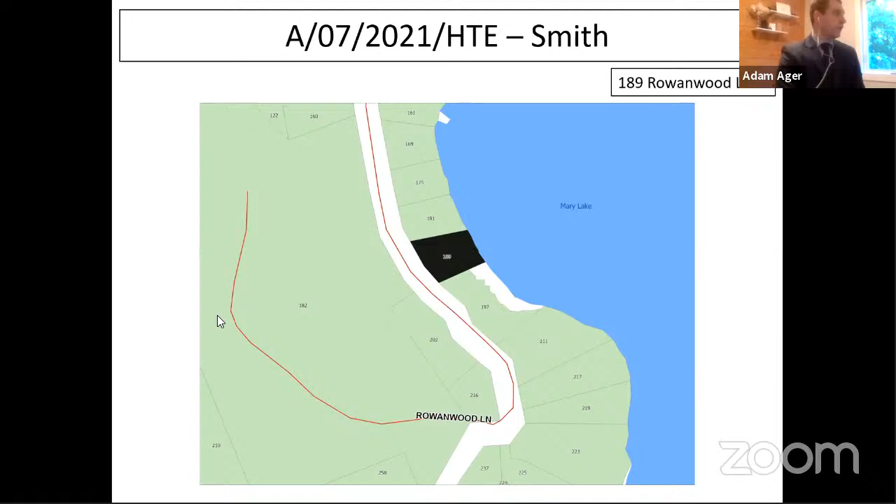Thank you, Mr. Chair. Through you, the subject property is located at 189 Rowanwood Lane. The subject property is designated waterfront in the official plan and is zoned Shoreline Residential 1.

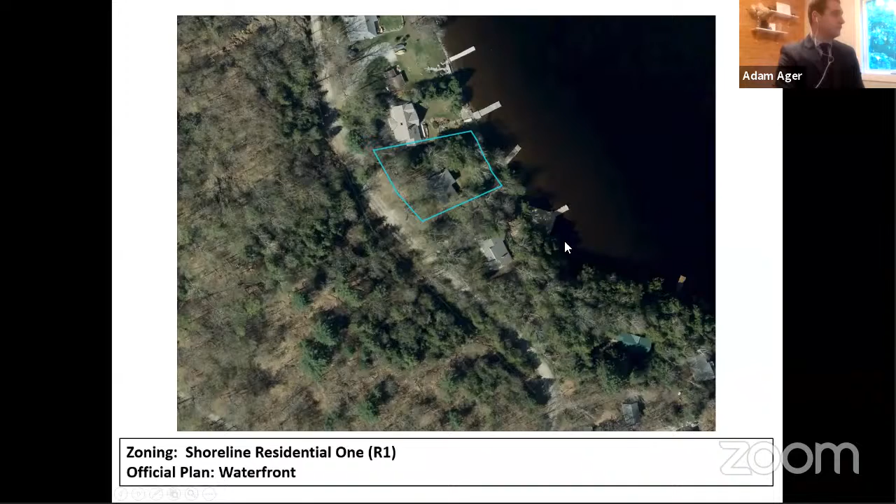The applicant is proposing to construct a balcony onto the existing cottage and replace the previously existing dock. A minor variance is required to increase the primary lot coverage from 10% to 11.5% and increase the accessory lot coverage from 5% to 7.5%. Lastly, the applicant is proposing to increase the maximum permitted projection of the dock from 15 meters to 24.3 meters to allow for a water depth of 0.96 meters at the end of the dock.

The zoning bylaw allows for a maximum dock projection of 15 meters. However, there are provisions that allow docks to project up to 30 meters if it's required to achieve a water depth of 0.75 meters. In this regard, the applicants are seeking relief of an additional 4.65 meters beyond where the 0.75 meter depth would be achieved. And in their opinion, this relief will be to not beach their boat, which they previously experienced in summers past.

Staff are of the opinion that the increased projection does not appear to be justified based on the water depths that have determined to be reasonable, and further that the proposal would not be a minor projection, which would likely have large visual impacts when viewed from the lake and adjacent shoreline areas, and is not in keeping with the policies of the town's official plan, which establishes guidelines intended to limit the visual impacts of development along the waterfront.

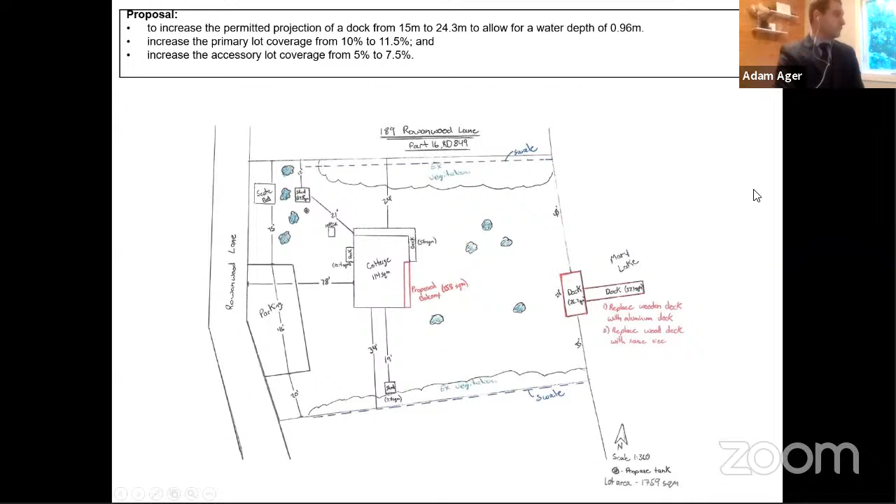The application was circulated in accordance with the provisions of the Planning Act, as well as to the Mary Lake Association. The Mary Lake Association has provided comments that are supportive of the variances for lot coverage. However, they are not supportive of the relief being sought for the dock. A copy of these comments were attached for committee's information, attachment number 4 to the planning report.

That's the next application. It is. My apologies.

In view of the 4 tests of the intent of the zoning bylaw with respect to the dock, planning staff are of the opinion that the 4 tests are not being met. The dock projection is larger than what is typically permitted, and further, it would not appear to meet the intent of the official plan, as the proposal does not adequately address policies related to visual impact and waterfront character. The proposal is not desirable as it is much larger than necessary, resulting in greater visual impact. Finally, this is not a minor deviation from the provisions of the zoning bylaw. As such, staff are recommending that this portion of the application be denied.

Further, with respect to the portion of the application for lot coverage, staff are of the opinion that the 4 tests for the minor variance are being met and are recommending approval, conditional on the owner revegetating the shoreline buffer to the satisfaction of the town through site plan control. I'd be happy to answer any questions you have.

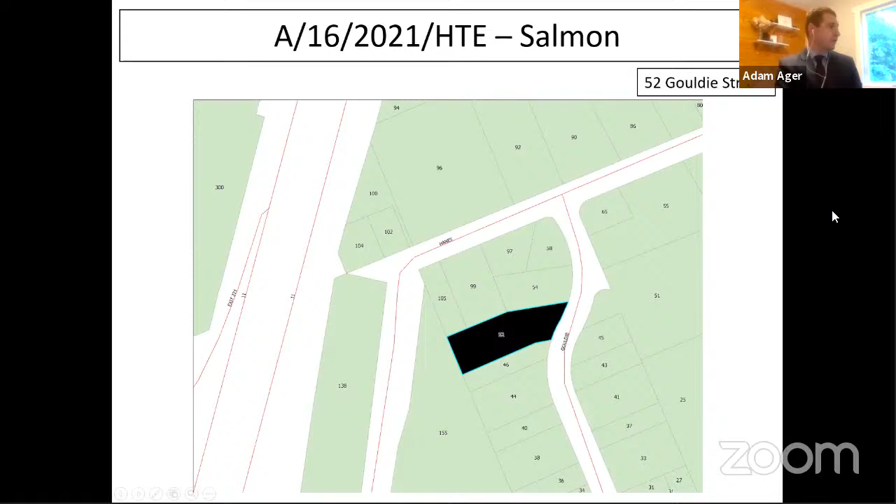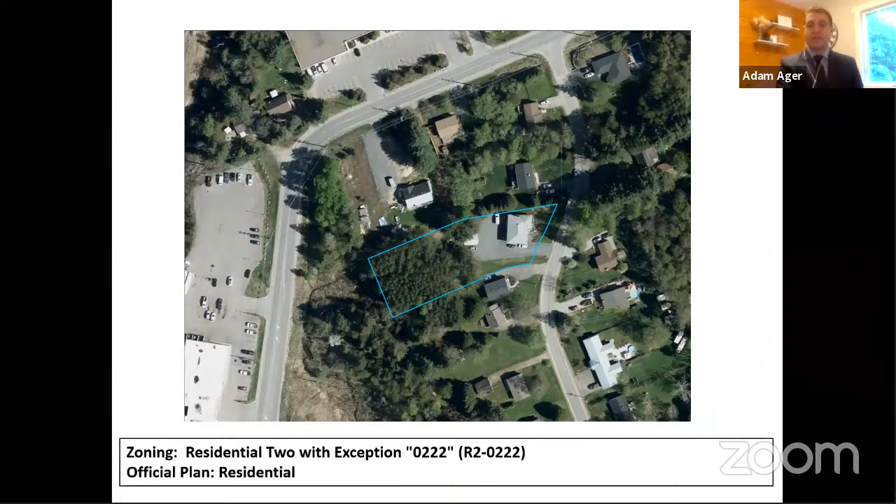The lot is designated urban residential in the town's official plan and is zoned Residential 2 with exception 0222. The site-specific exception on the lot permits a maximum of 3 residential units within the existing building.

The applicant is proposing to construct a new detached garage, and if given favorable consideration, they are proposing to remove the existing shed on the subject lands. A minor variance is required to reduce the minimum setback from a warm water stream from 20 meters to 10 meters for the detached garage only.

The applicant, in support of the application, hired Riverstone Environmental Solutions, Inc., who submitted a watercourse assessment report. The report included mitigation measures as well as recommendations to appropriately address this feature and make sure that the construction and development would not interfere with or harm the feature identified.

Staff are of the opinion that the mitigation measures proposed are reasonable and are also in keeping with the purpose of the provisions of the zoning bylaw. As such, it is recommended that the mitigation measures contained in the report be a condition of approval, should the variance be approved. Staff are of the opinion the proposal is also consistent with the intent of the official plan policies respecting urban residential areas.

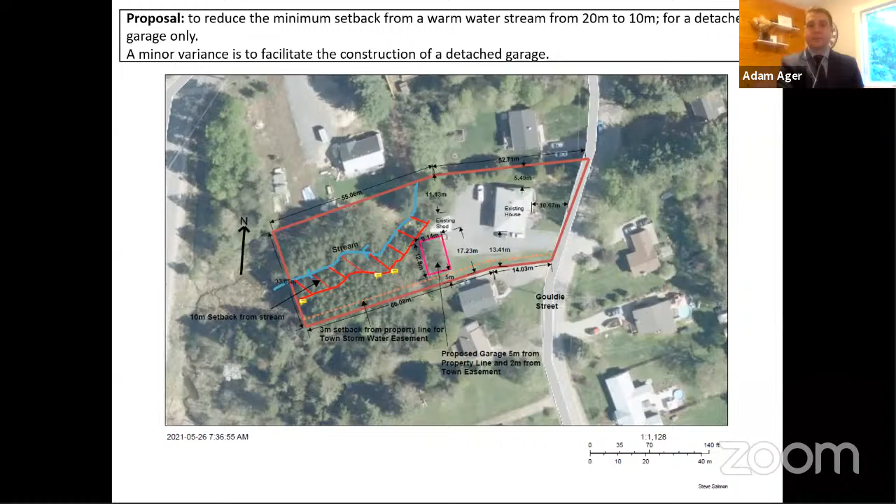The application was circulated in accordance with the provisions of the Planning Act. No concerns or objections have been raised.

The application would appear to conform to the 4 tests for a minor variance as set out in the Planning Act, and staff are recommending approval conditional on 3 items: that the recommendations contained within the watercourse assessment be implemented at the building permit phase, that the existing shed be demolished and removed, and that an easement exchange recommended in staff report Corp 2021-41 be completed. I'd be happy to answer any questions that you may have.

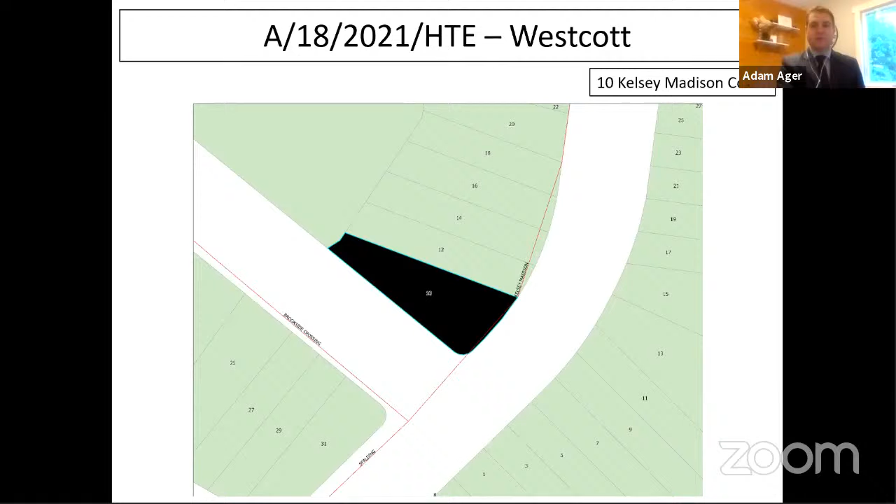All right, Adam, you have one more for us, the Westcott application. I do, thank you, Mr. Chair. Once again, I hope everyone's able to see my screen. Yep, excellent. Thank you. The subject property is located at 10 Kelsey Madison Court.

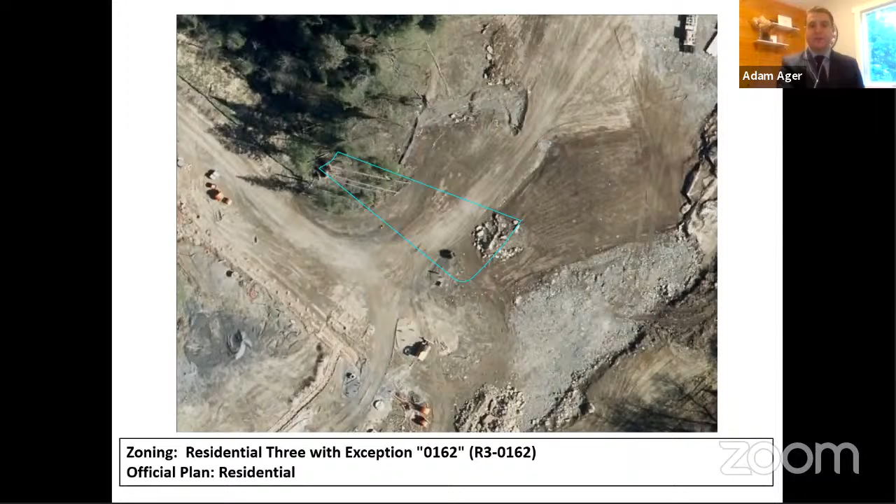The lot is designated in the urban residential area, and it is zoned Residential 3 with exception 0162. This specific exception allows for reduced front yard setbacks, reduced rear yard setbacks, and interior side yard setbacks. It also permits an increased encroachment for decks into the rear yard and an increased coverage compared to the standard R3 zone. The subject property is developed with a townhome, and the application has been submitted to recognize the location

of an existing deck on the subject lands. A minor variance is required to reduce the minimum exterior side yard setback from 3 meters to 0.9 meters for the deck only. As noted in the staff report, the purpose of the exterior side yard setback provisions is to provide adequate space for maintenance, drainage, and also sight lines at the corner.

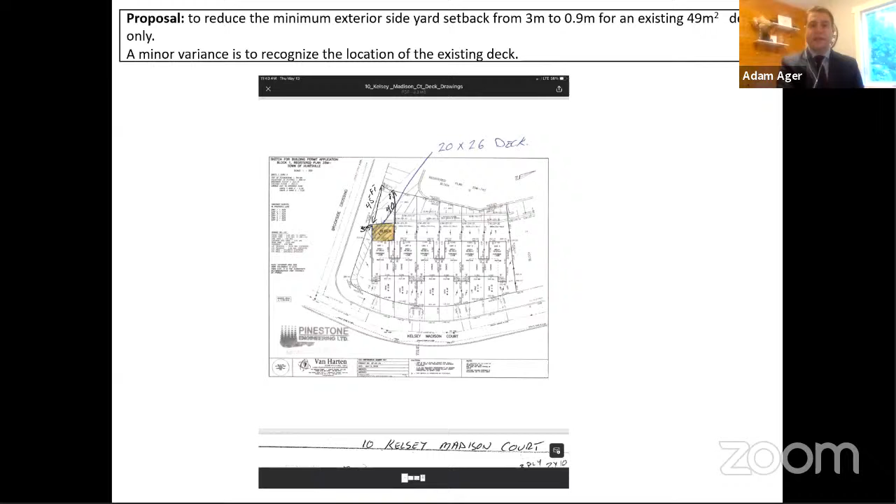The application was circulated in accordance with provisions of the Planning Act, and one letter of support was received from the adjacent property owner, who is in support of the application. A copy of those comments were attached to the staff report for committee's consideration.

Staff are of the opinion that the proposal does meet the 4 tests for a minor variance as set out in the Planning Act, and as such, staff are recommending approval of the application. I would be happy to answer any questions you may have.

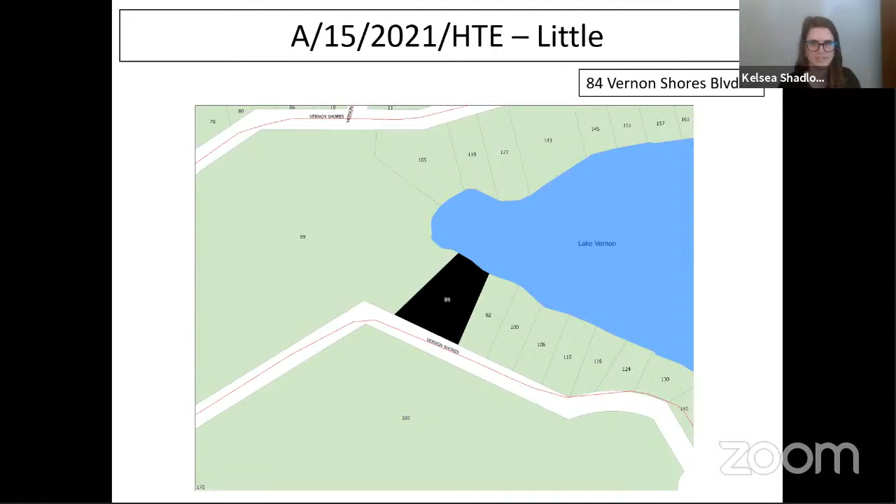Chair. Through you, the subject property is located at 84 Vernon Shores Boulevard. The lot is designated waterfront and is zoned Shoreline Residential 1 and Natural Resource.

The application has been submitted to recognize a 134.89 square meter single detached dwelling with an attached garage and deck that is being constructed within the 30-meter setback required to be maintained from type 1 fish habitat. A minor variance is required to reduce the setback from 30 meters to 22.7 meters.

The lot was previously developed with a dwelling, dock, garage, and 2 sheds. Redevelopment of the site was proposed and the property received site plan approval, and a site plan agreement was prepared showing the new dwelling and all accessory structures in complying locations. However, following the commencement of construction, it was confirmed that the new dwelling encroaches within the 30-meter setback.

To address the type 1 fish habitat, a fish habitat assessment was completed by Riverstone Environmental Solutions, Inc. The report provided background on the Lake Vernon fishery, type 1 fish habitat, and the site conditions. The report concludes the project has a low likelihood of negatively impacting the fish and fish habitat on or adjacent to the subject property.

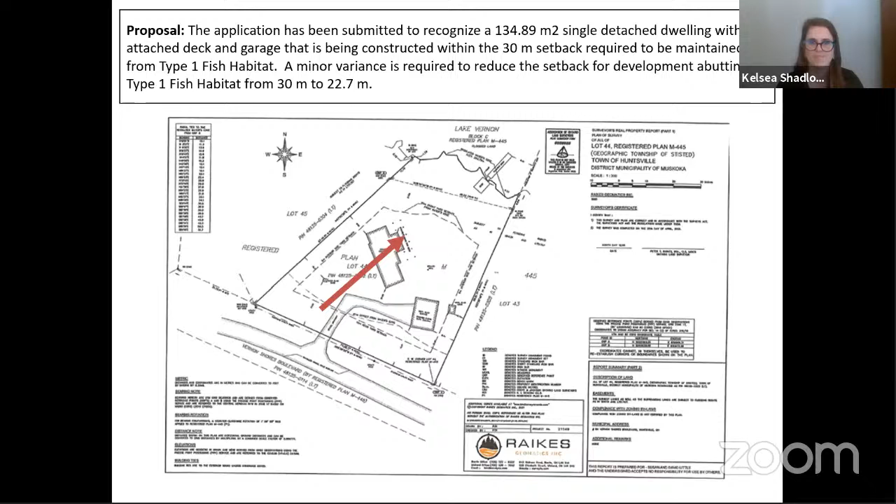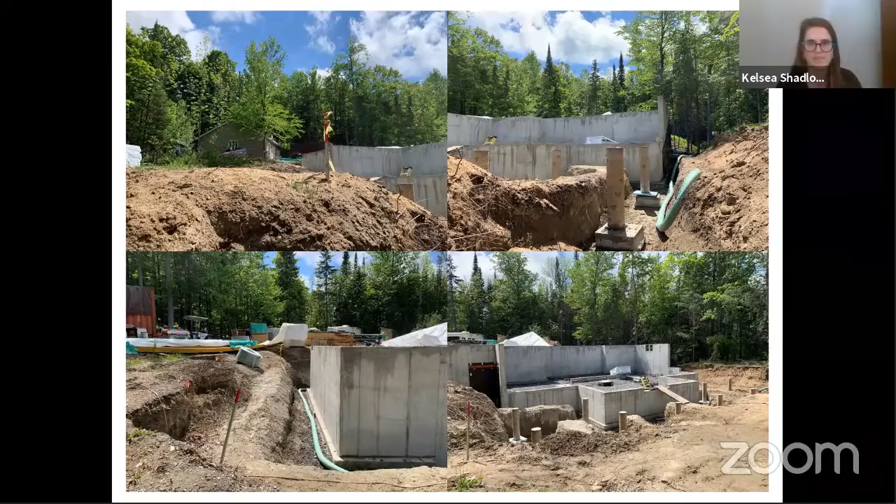Natural constraint mapping also identifies steep slope areas and deer wintering habitat stratum 2. As the proposal seeks to redevelop the lot and the dwelling is sited away from steep slope areas, impacts to these constraints are minimal. The application was circulated in accordance with the Planning Act and to the Lake Vernon Association.

Comments from the Lake Vernon Association were received following the publication of the report and were provided to committee. They inquired about the fish habitat study being completed. As mentioned, a fish habitat assessment was submitted in support of the application. Letters of support were also received and attached to the report package.

The application would appear to conform to the intent of the official plan and be consistent with the provincial policy statement. Additionally, the application appears to satisfy the 4 tests of a minor variance as set out in the Planning Act, and therefore staff are recommending approval. I'd be happy to answer any questions you may have.

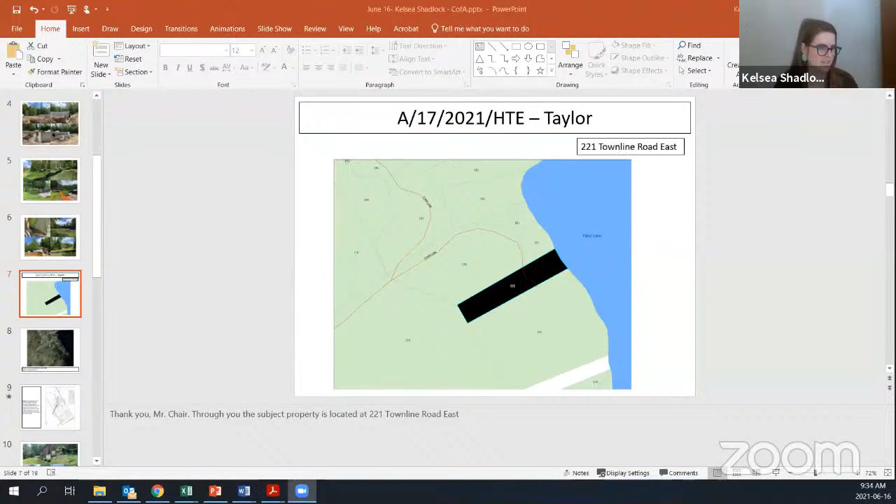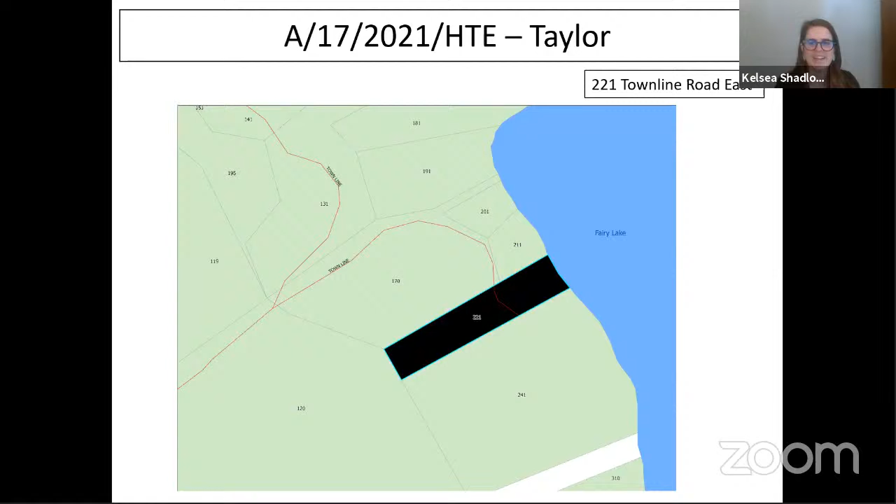Through you, the subject property is located at 221 Townline Road East. The lot is designated waterfront and is zoned Shoreline Residential 4. The application has been submitted to permit a 189.62 square meter single detached dwelling with an attached deck and garage. The minor variance is required to increase the primary lot coverage from 5% to 6.89%.

Additionally, it is recommended that accessory lot coverage be reduced to 3.11% from 5% to remain more in keeping with the zoning bylaw. Constraint mapping identifies type 1 fish habitat abutting the proposed development. As the proposed development is outside of the 30-meter setback required, potential risks to type 1 fish habitat are mitigated.

Natural constraint mapping also identifies steep slope areas between 30 and 40%, and 40% and greater. When development is proposed within steep slope areas, the degree of slope and slope stability will be confirmed by the town through site inspection and/or in the review of detailed information provided for the development proposal.

On inspection, staff noted the existing dwelling is optimally sited for the property's topography, as the proposal seeks to redevelop the lot and is sited on a less sloped portion of the property. Slope-related risks are minimized. Mitigation measures to minimize vegetation removal outside of the building envelope and ensure tree preservation will also be implemented through an amended site plan agreement should the minor variance be approved.

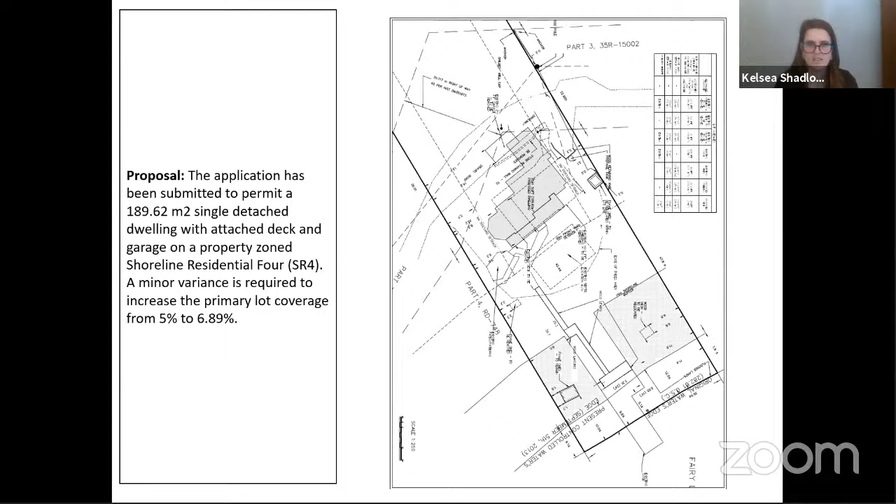A condition to remove shed B to comply with the maximum of 3 enclosed and roofed accessory buildings on the lot is also recommended. For your reference, this is shed B, which is shown on the sketch to be removed.

The application was circulated in accordance with the provisions of the Planning Act and to the Fairy Lake Association. No concerns or objections have been raised. A letter of support was provided regarding the right-of-way, which was included in the report package.

The application would appear to conform to the intent of the official plan and be consistent with the provincial policy statement. Additionally, the application appears to satisfy the 4 tests of a minor variance, and therefore staff are recommending approval. I'd be happy to answer any questions you may have.

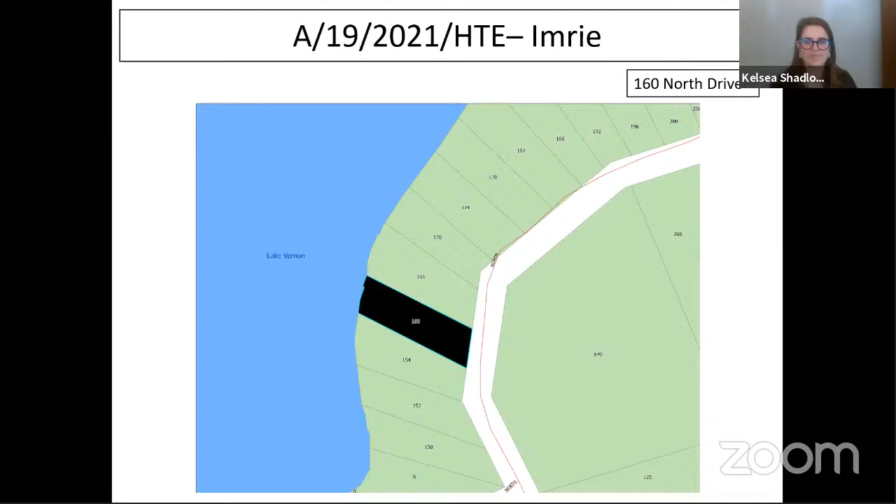Yes, excellent, thank you. So thank you, Mr. Chair. Through you, the subject property is located at 160 North Drive. The lot is designated waterfront and is zoned Shoreline Residential 1.

The application has been submitted to permit a 113.8 square meter garage with storage above. A minor variance is required to decrease the north interior side yard from 6 meters to 3.6 meters, to exceed the 60 square meter maximum area provision for 2-story garages, and increase the accessory lot coverage from 5% to 8.62%.

Other constraints were also noted, including unevaluated fish habitat, cold water lake, and lake trout habitat. As the new structure would be set back more than 30 meters from these shoreline features, these would not be impacted.

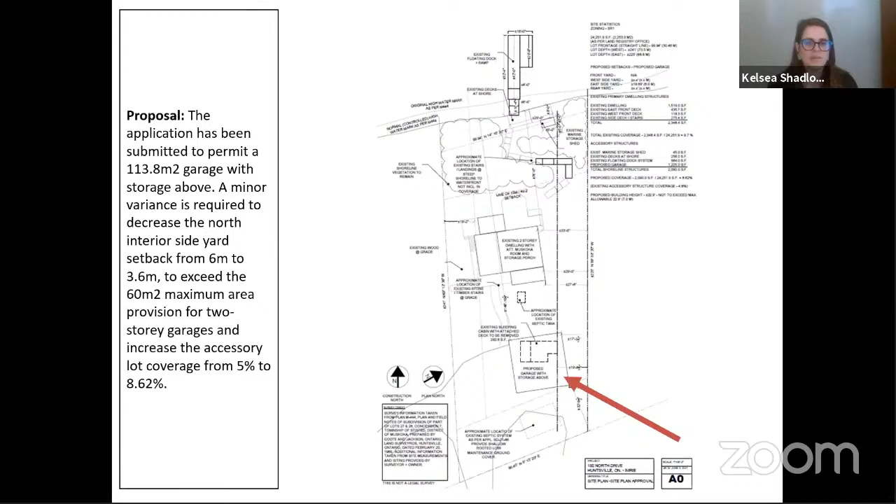Additionally, upon review of the application, both the existing dock and dryland boathouse shown on the site plan do not meet the zone requirements. The dock in its current configuration extends beyond the 15 meters permitted from the shoreline, and the dryland boathouse is not permitted as a shoreline structure.

A letter from the neighbor was provided noting that the shoreline structures have existed in their respective locations since at least 2008, prior to the adoption of the current zoning bylaw. The 1974 previous bylaw did not limit dock projection, and as such, this structure can be considered legal non-complying.

However, it could not be confirmed if the dryland boathouse is legal non-complying, given its existence for a number of years on the property. Staff are recommending this structure be recognized.

The application was circulated in accordance with the provisions of the Planning Act and to the Lake Vernon Association. Comments from the Lake Vernon Association were received following publication of the report and provided to committee. The Association raised concerns regarding overdevelopment of the property, given the size of the lot, and expressed concerns for negative impacts to adjacent properties.

In this instance, staff felt the proposed garage was appropriate as it has little to no visual impacts along the water, as it's hidden by the topography and existing vegetation. The garage also reflects the scale of the dwelling and the surrounding residential character. Letters of support were also received for the proposal and attached to the report package.